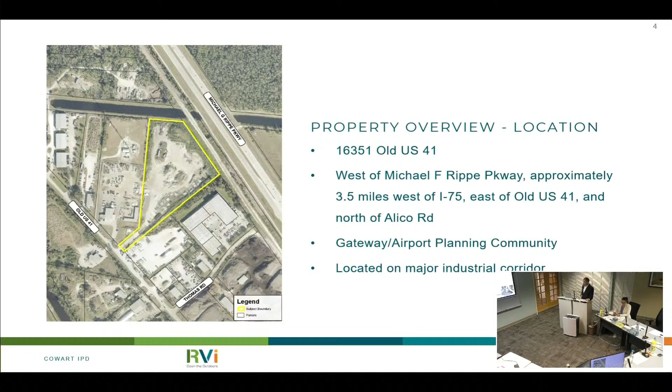The property is located next to similar industrial uses, being a recycling center, vehicle repair shop, construction company, and is currently zoned IPD. This, I believe, was originally zoned IPD in the 90s, but the IPD had a very specific schedule of uses and site plan, so this is just to broaden the allowed uses on the site and make more of a standard concept plan that would allow for the flexibility of different uses.

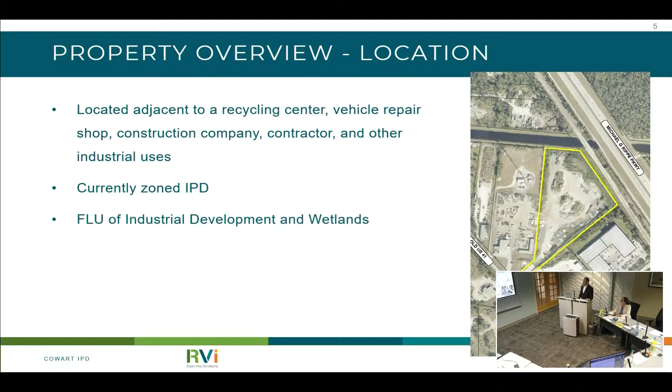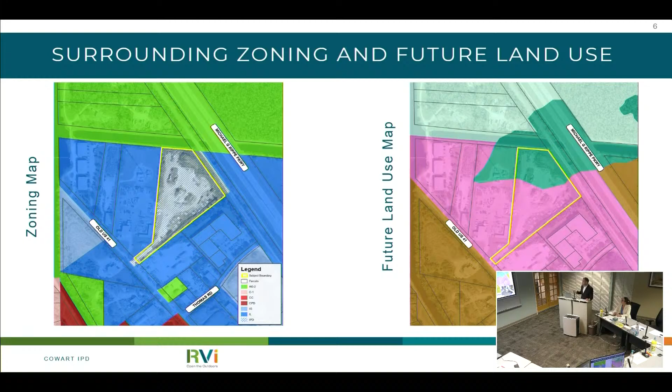The future land use is industrial development and wetlands. Zoning map showing it is currently zoned IPD and confirming the industrial development future land use, with wetlands being in the corner here in the future land use.

This is the concept plan that we're presenting. There's a type B buffer located along the front and the rear of the property. No buffer to the adjacent uses, being industrial. And there is 1.69 acres of open space required. We are providing 3.10 acres of open space with our planned buildings around the perimeter of the site, and parking and open storage space at the center of the site, and a 25-foot buffer or setback along the exterior of the property.

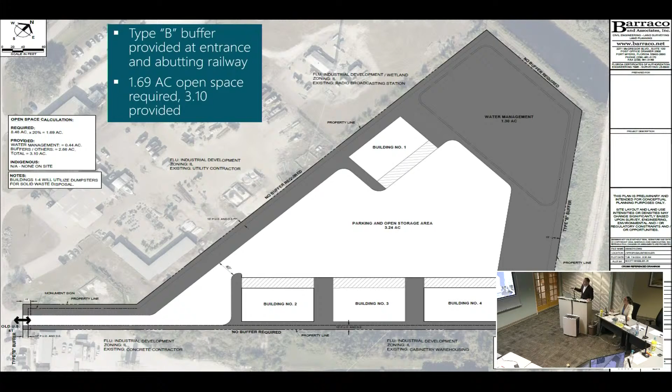For compatibility, this is similar industrial uses surrounding the property, similar to what the property currently is, just, as I mentioned, expanding the uses, a type B buffer to the front and rear property, and as I mentioned, the 25-foot perimeter setback from the PD boundary.

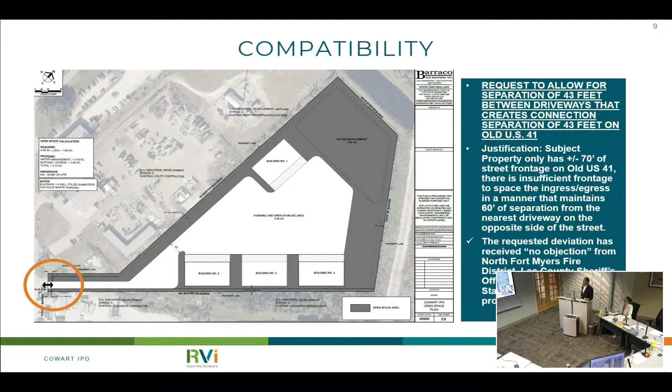For deviations, we have one deviation that we're requesting at the front. It's a request to allow for a separation of 43 feet between driveways that creates a connection separation on Old US 41. For justification, the subject property only has a 70-foot street frontage on Old US 41, so there's insufficient frontage to provide that separation of 60 feet. And this request has received no objection from all applicable agencies. For utilities and stormwater, I'd like to defer to our engineer, Carl Barraco Jr.

Good morning, Madam Hearing Examiner. For the record, Carl Barraco Jr. I'm Vice President at Barraco & Associates and also a registered professional engineer in the state of Florida.

So to address the utility portion of this project, there is currently central potable water to the project, but the project does not currently have central sanitary sewer. When the applicant does move forward with the development order, we will look to see if there is centralized sanitary sewer. If there is, we'll make a connection to that. If not, the next step would be to permit a septic system through the Florida Department of Environmental Protection. So when we get to that part of the development process, we will look at those options and select what we think is best for the project.

With the stormwater management, the system will be designed in accordance with all local, state, and federal criteria. To give you an idea of how we plan to design this, we will keep all the stormwater runoff contained within the site, and you can see some of the flow arrows that we have posted on the site plan that will, either via open swale or hard pipe drainage, convey all the runoff back to the approximate 1.3 acre water management system to the north of the property.

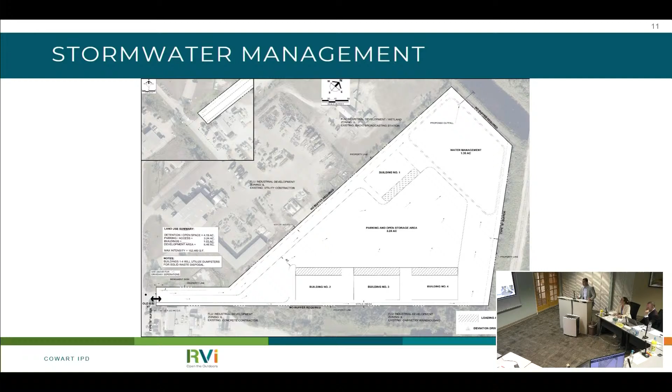So, will you need an ERP for this? Yes, ma'am, we will. Okay. And so the water quality concerns that were raised in the staff report, there's a county condition, but those will also be conditioned through the ERP as well? Yes, ma'am, and they'll be designed with the new Clean Waterways Act standards that were recently adopted by the state. So that concludes my portion of the presentation. I will hand it over to Bridget with Passarella for the environmental portion.

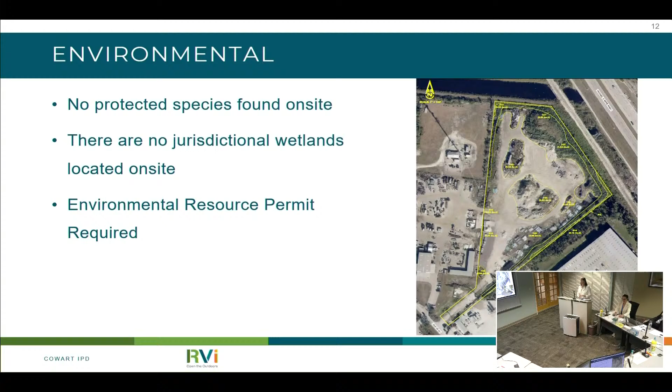Good morning. For the record, Yury Bykau with TR Transportation Consultants. I've been sworn in and previously accepted as an expert in transportation planning. I'll briefly go over some of the transportation aspects of this project. We prepared a traffic study for this rezoning application based on 152,460 square feet of uses.

As part of our traffic study, we first prepared our typical trip generation analysis consistent with the latest ITE Trip Generation Manual. We reviewed the proposed schedule of uses, and we made sure we're utilizing the highest traffic generating use from the schedule of uses. We then took the trips and added them to the surrounding roadway network and conducted our typical link level of service analysis, which included Alico Road, east and west of Old US 41.

The results of our level of service analysis indicated Alico Road to operate at an acceptable level of service C, both with and without the project traffic under the future build-out traffic conditions. We also analyzed the proposed access driveway on Old US 41, and the results indicate an acceptable level of service, with that access point operating with minimal delays.

And that's all we had to prepare at this time for this rezoning application. We still have to go through the development order process. That's when we'll do another traffic study. It'll be much more detailed. It will look at site-related improvements, such as the need for turn lanes, etc.

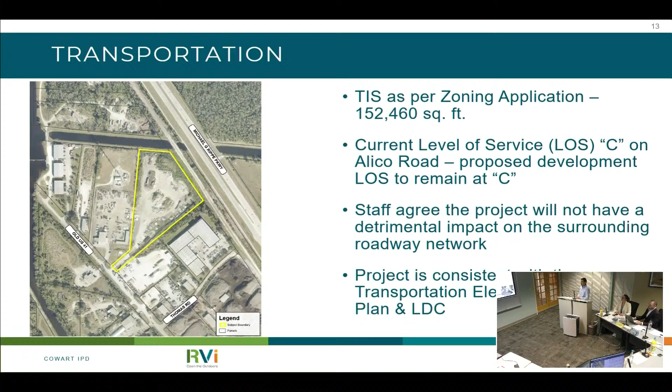I believe warehousing was the use that you chose. Is that correct? Yes. And that is the highest traffic generating use of the entirety of the schedule of uses proposed? Yes. Okay. Thank you. Thanks.

Right, next, we want to outline the consistency with the Lee County Comprehensive Plan. Staff finds that the request is consistent with the Lee Plan's policies, goals, objectives, and standards. We'll just go over a couple of them. Policy 1.1.7 outlines the industrial development future land use category and the uses within that, and this is in compliance with that. Development location and timing, Objective 2.1 and 2.2. Staff found that it is consistent with that as well.

Water and sewer, as our engineer outlined, we will be connecting to county sewer. I'm sorry, county water, correct? County water, I'm sorry. Okay. Thank you. Sewer is going to be determined based on the generation of the flows. Correct, correct. Policy 7.1.3, located in an appropriate area. This is an area with similar industrial uses. And for surface waters and surface water monitoring data, we are also in compliance with 125.1.2 and 125.1.4.

For the decision-making criteria, staff finds that the request complies with LDC 34-145(D)(4)(a)1 and (a)2. We are compatible with the existing planned uses in the surrounding area as well as the other regulations. In conclusion, staff did recommend approval of our application, and the applicant is in agreement with the staff report and conditions outlined in the staff report.

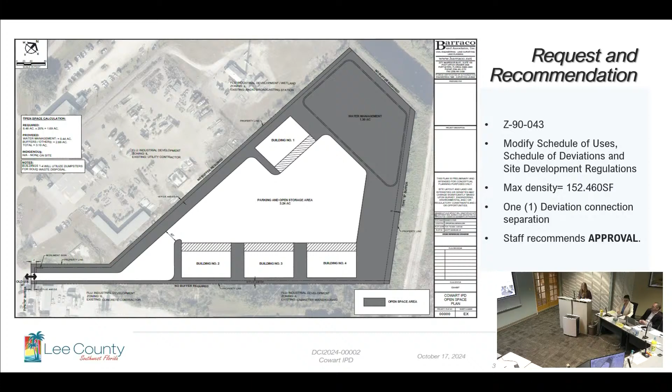Okay, I'll start with the request and recommendation. RVI Planning and Landscape Architecture on behalf of the owner, SWUSI LLC, has filed an application to amend the construction burning IPD initially approved by Resolution Z90-043 to modify the schedule of uses, the schedule of deviations, and the site development regulations. The proposed maximum development intensity is 152,460 square feet, and the applicant has requested one deviation from land development code requirements related to connection separation. Staff has recommended approval of the request with conditions.

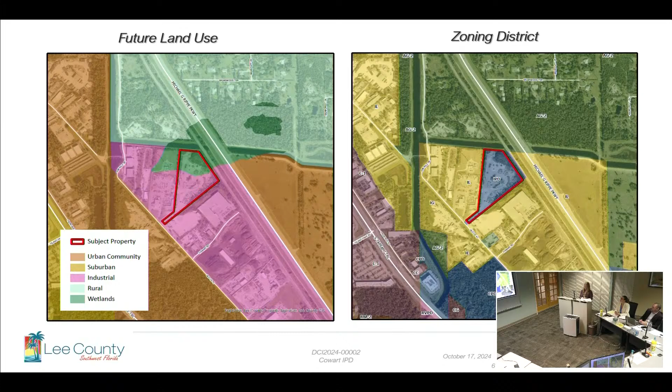Some background on the property. Again, the subject property is located at 16351 Old US 41. It is south of Briarcliff Road and north of Alico Road and consists of one strap number and is within the industrial development and wetlands future land use categories and the coastal high hazard as established by Lee County Comprehensive Plan. And the property is zoned IPD.

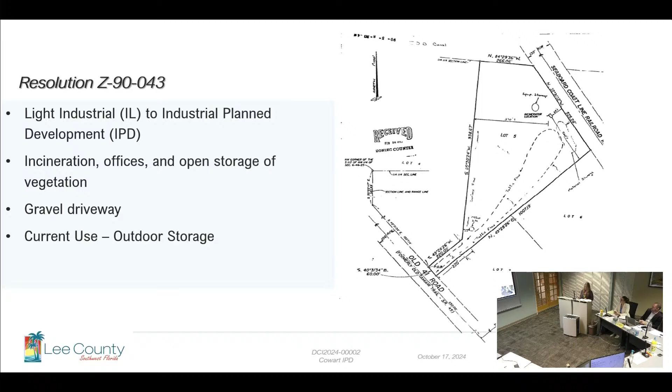Approximately 9.11 acres of land, including the subject property, were rezoned from light industrial to industrial plan development by Resolution Z90-043 to permit an incineration use and ancillary office not to exceed 35 feet above average grade. The approved schedule of uses also included open storage of the vegetation to be incinerated, and the subject property has a gravel driveway and is currently used for outdoor storage of materials.

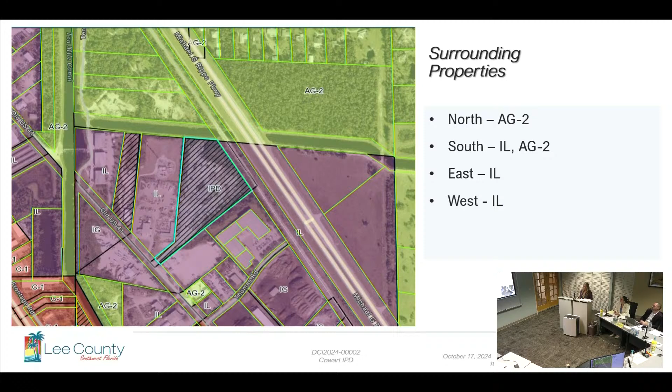To the north of the subject property, across Michael G. Rippe Parkway, are conventionally zoned Ag 2 properties, and to the east, light industrial. Properties to the south of the subject property across Old US 41 are a mix of light industrial and Ag 2, and to the west are light industrial zone districts as well.

So covering LDC section 34-145, the following slides will demonstrate how the applicant has met the listed criteria for the hearing examiner to approve the request. Starting with Lee Plan analysis, Lee Plan policy 1.1.7 and 1.5.1 for the industrial development and wetlands future land use. Again, the parcel is located in the industrial development and wetlands future land use. The industrial development future land use category is described by policy 1.1.7 as areas characterized by the special locational requirements needed to support industrial uses.

As part of the future urban and suburban areas pursuant to Objective 1.1, the project site is in a designated area for varying intensities that provide for a full range of urban activity. Industrial uses are permitted in the industrial development future land use category, and the proposed amendment to the IPD to allow additional industrial uses is consistent with this objective.

The future land use map does indicate some areas of wetlands on the subject property. Permitted uses in wetland future land use categories per policy 1.5.1 consist of just very low density residential and recreational uses that won't adversely affect the ecological function of wetlands. The applicant provided a protected species and environmental report indicating on-site jurisdictional wetlands exist on the property.

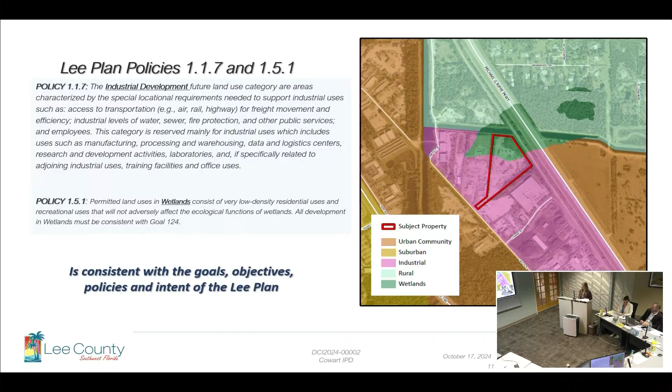County environmental staff have included a condition that additional information at time of development order will be required to ensure those wetland impacts are mitigated via the state of Florida requirements. The condition also read that the construction may not commence until the issuance of the required permits.

For Objective 2.1 of the Lee Plan, this promotes contiguous and compact growth to contain any urban sprawl. The proposed amendment will allow development of an infill project in an area along Old US 41 where industrial development is encouraged. Proposed amendment will allow for clustered development patterns in an area with existing roadways and allowable industrial uses.

Objective 2.2 and Policy 2.2.1 discuss new growth in future urban areas where adequate public facilities exist. The property is located within an existing IPD and lies along the county-maintained local road of Old US 41, and existing infrastructure of water and sewer is in place, and utilities are available to the site. Adequate public facilities, including fire, EMS, and solid waste, also serve the property.

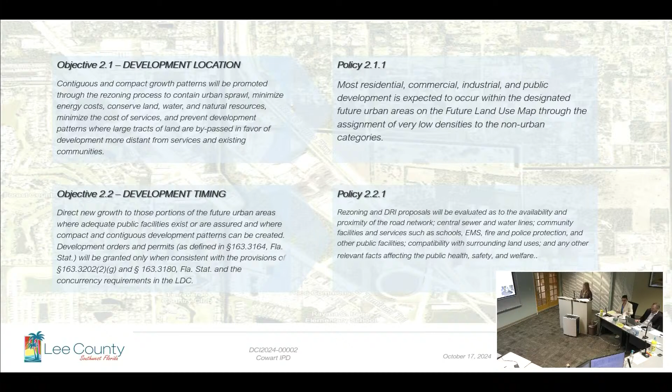The applicant has provided a letter of availability from the Lee County Utilities stating potable water and sanitary sewer lines are in operation adjacent to the property and that there is sufficient capacity. Goal 7 of the Lee Plan covers industrial land uses, and this Lee Plan promotes opportunities for well-planned industrial development at suitable locations within the county. The proposed development is adjacent to existing industrial developments and resides within the industrial development future land use category. The proposed amendment will align this property with uses consistent with industrial development.

In compliance with Policy 7.1.1, factors applicable to development and rezoning standards, development of the property will adhere to the LDC and other applicable regulations. The proposed amendment affects property in close proximity to established major roadways of Old US 41 and Michael G. Rippe Parkway. Lee County Utilities offers existing potable water and sanitary sewer. Policy 7.1.2 encourages industrial development in the industrial development future land use.

Pursuant to Policy 7.1.3, the site is strategically located in an area that incentivizes industrial development with existing roadway infrastructure and utility capacity. The project, again, is an existing IPD with available services fulfilling Policy 7.1.4, and the property is centralized within the industrial development future land use category with the most intensive industrial uses permitted by the LDC fulfilling Policy 7.1.5. The property does not abut a residential use, so therefore no screening or buffering will be required as per Policy 7.1.6 and 7.1.7.

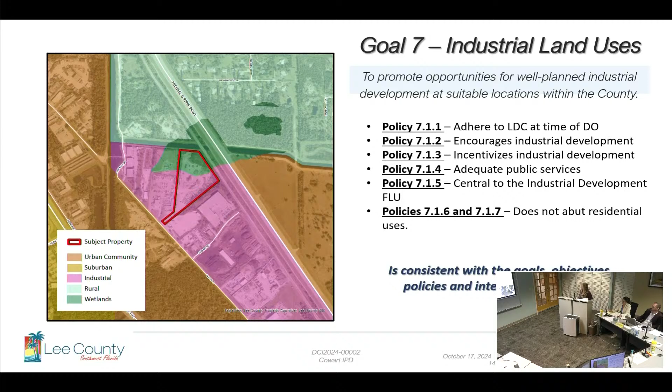Pursuant to Policy 60.1.1, the applicant has acknowledged that surface water management systems will be designed to protect or enhance the groundwater, on-site wetlands, and take into account the site's close proximity to the 10-mile canal. Policy 61.1.6 states that when and where available, reuse water should be the first option for meeting irrigation. The applicant has indicated the site development will prioritize the reuse of water if available at time of development order, but that due to the industrial nature of the property, irrigation will be a low demand.

The amended schedule of uses eliminates many of the most hazardous materials that would typically be allowable in the IPD zoning districts to prevent those environmental impacts on the surrounding properties. The applicant has indicated that any end development will take precautions to prevent hazardous materials from making contact with the environment, which does fulfill Objective 69.3 for hazardous materials.

The applicant indicated that the site design will ensure that pretreatment of stormwater prior to discharge will be in accordance with state regulations pursuant to Policy 125.1.2. And an environmental resource permit will be obtained from South Florida Water Management District prior to construction. And the applicant stated continuing monitoring will be completed to ensure proper discharge from the site. Lee County Natural Resources staff have provided a staff report implementing additional conditions for a water quality monitoring program fulfilling policies 126.1.3 and 126.1.4.

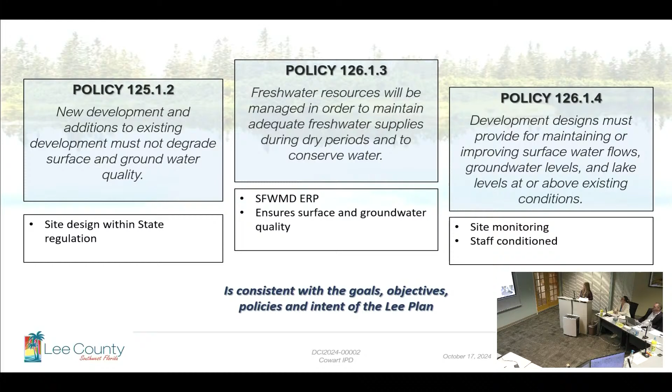Goal 127 for air quality is to ensure the best possible air quality, meeting or exceeding state and federal air quality standards. The schedule of uses, again, was revised to remove many of the most intense uses, and the proposed development will comply with all local, state, and federal governmental requirements, and an FDEP permit must be obtained for any intensive industrial uses.

For meeting the code and other applicable county regulations, the applicant has acknowledged that at the time of development, compliance with LDC and other applicable county regulations will be required. The applicant has requested and justified one deviation for the planned development pertaining to connection separation. This is in addition to one previous deviation approved by Resolution Z90-043 for minimum lot width for an industrial use, which has been withdrawn with this application.

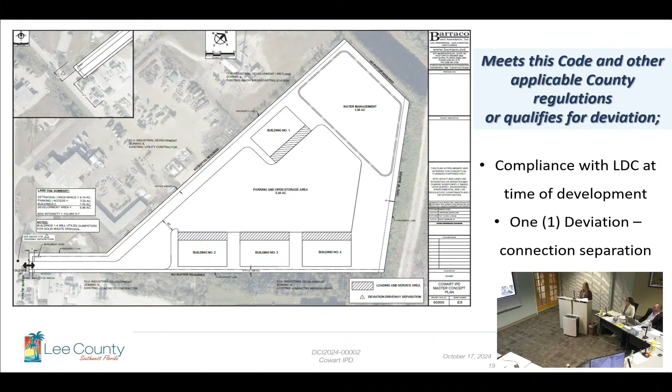As the applicant has stated already, Deviation 2 seeks relief from LDC Section 10-285A, which requires a minimum connection separation of 60 feet between driveways on urban local roadways to allow a minimum connection separation of 43 feet. And staff and Lee County Department of Transportation have provided traffic-related analysis supporting the applicant's justification, and have recommended approval of the deviation.

Proposed amendment will allow for development of an infill project, as we've covered. As previously mentioned, the subject property is part of an existing IPD and lies within the industrial development future land use category. Surrounding uses include a variety of industrial uses, and the proposed amendment adds a mix of industrial uses that will be consistent and compatible with surrounding properties.

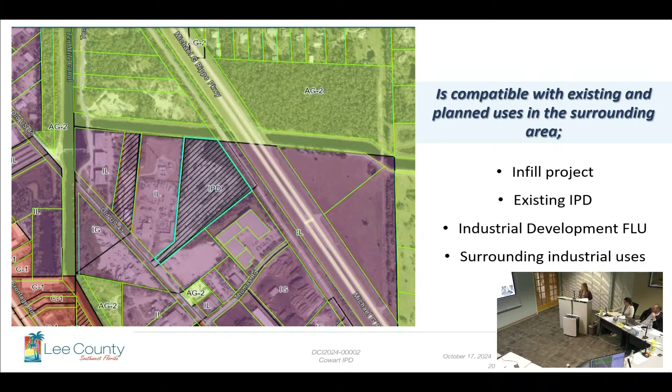On that for a moment, I didn't see anything in the materials, and I don't know if you evaluated. There's an MPD application that was heard just a few weeks ago, and I don't know if any analysis was done with respect to that project as well. No. It hasn't been approved yet, but I think it was a former DRI. It wasn't my case. Okay. But I remember seeing it, and it's directly across the street to the south, but it has residential components to it as proposed, maybe a hotel or something, I recall, but that wasn't looked at when staff reviewed. No, it wasn't. I can go back and take a look. Okay, thank you.

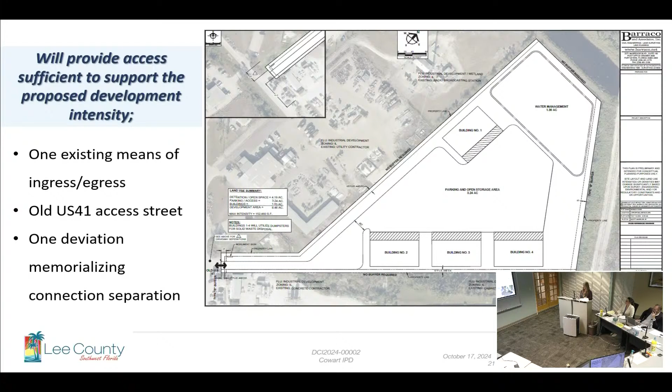Yeah. The proposed amendment to the IPD requests a deviation to memorialize a connection separation of less than the required 60 feet, which will be sufficient to serve the single-use industrial site. And Old US 41 is a two-lane local road that serves as an access street for the surrounding industrial site. The site has one existing means of ingress and egress and has been approved by the San Carlos Fire Protection and Rescue Service District and the Lee County Public Safety.

The area has been reserved for industrial and mixed-use development focused on non-residential uses, and an existing IPD is already approved for this site. Applicant has demonstrated through the traffic impact statement that the surrounding roadway network can accommodate the proposed development. I believe TR Transportation covered that well, so I won't belabor the level of service too much on that. But at time of development order, the proposed development will be reviewed again to determine the required site-related traffic improvements.

The applicant submitted an environmental report indicating most of the site consists of non-indigenous habitat consisting of berms, spoil areas, ditches, and disturbed land. As we've established, the north portion of the site is within that wetlands future land use category. Applicant has not been issued a formal jurisdictional wetland determination as of the time of the staff report, or a South Florida Water Management environmental resource permit.

All development in wetlands must be consistent with Goal 124, which states an applicant must demonstrate what type of mitigation measures will be required by the state to impact the state wetlands. Environmental staff have recommended in a condition that at time of DO, construction may not commence until the issuance of those required permits.